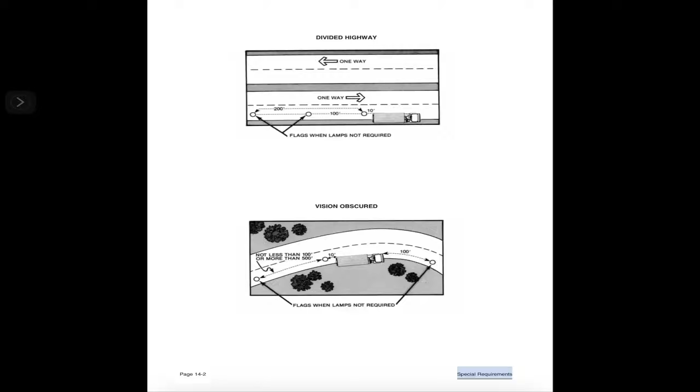The first thing the driver of a disabled vehicle must do is put out the proper flares, flags, or reflectors to a roadway. Special requirements. Page 14-1. Divided highway. Vision obscured. Page 14-2. Special requirements. Vehicle lighting and reflector requirements.

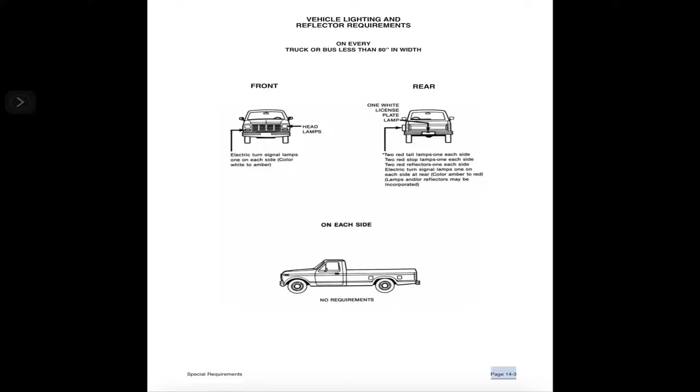On every truck or bus less than 80 inches in width: front, rear. Special requirements, page 14-3. On every truck or bus 80 inches or more in width: front, rear. Page 14-4. Special requirements. Front, rear.

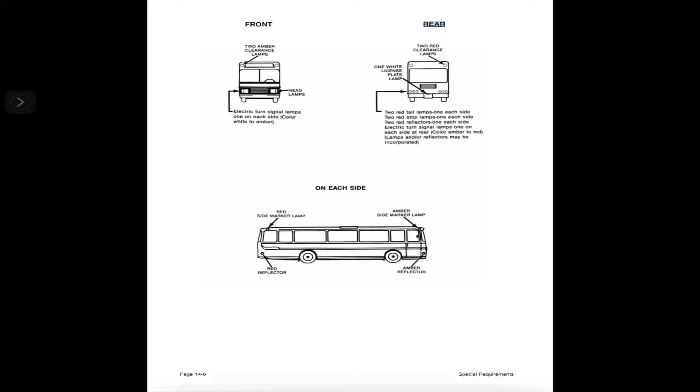Trucks manufactured or assembled prior to model year 1960 required to have at least 1 tail light. Special requirements, page 14-5. Front, rear. Page 14-6. Special requirements. Front, on every truck tractor. Rear. Special requirements, page 14-7.

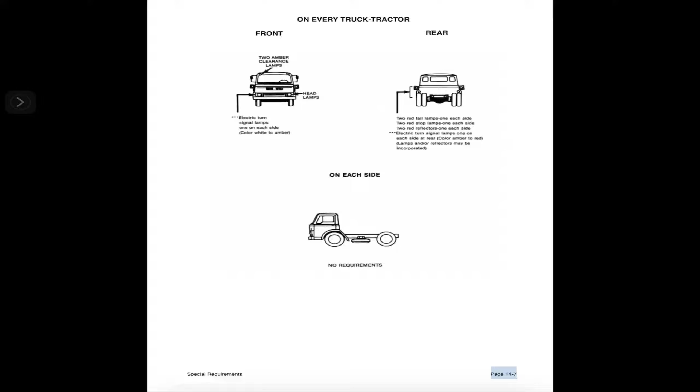On every trailer 80 inches or more in overall width: front, rear. Intermediate side marker lamp and reflector required only on trailers measuring 30 feet or more in length. Page 14-8. Special requirements. On every trailer less than 80 inches in width: front, rear, on each side. Special requirements, page 14-9.

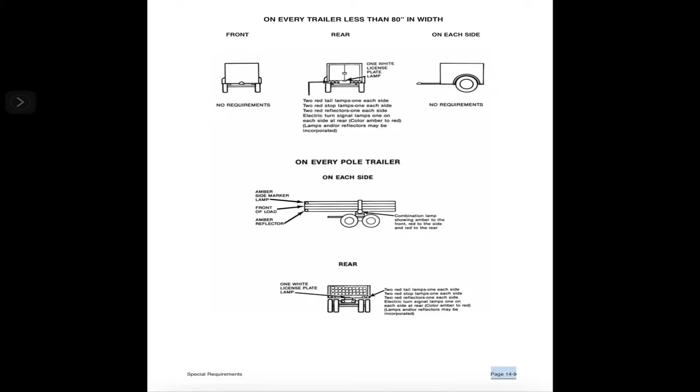Flashing lights. Flashing lights are permitted on emergency vehicles, on snow removal equipment, and on school buses when stopping or stopped for children to board or alight. These lights are also allowed to be used by tow trucks under the direction of a law enforcement officer at the scene of an accident or while hooking up a disabled vehicle in the roadway.

Special regulations for certain vehicles.

When operated on the highway at night, all animal-drawn vehicles, implements of husbandry, road machinery, road rollers, and farm tractors not otherwise required to have lamps or lighting devices must have a white light on the front visible for 1,000 feet and 2 red lights on the rear visible for 1,000 feet, or 1 red light to the rear visible for 1,000 feet and 2 red reflectors visible for 600 feet.

Brakes: trailers, semi-trailers, and pole trailers with a gross weight of 4,500 pounds or less are exempt from brake requirements. Those with a gross weight in excess of 4,500 pounds but not exceeding 15,000 pounds, operated at speeds of 30 miles per hour or less, are not required to be equipped with brakes. If operated at speeds in excess of 30 miles per hour, they must have brakes acting on both wheels of the rear axle.

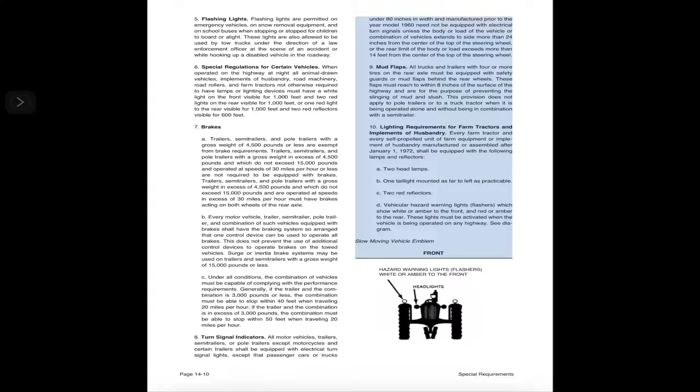Lighting requirements for farm tractors and implements of husbandry: every farm tractor and every self-propelled unit of farm equipment or implement of husbandry manufactured or assembled after January 1, 1972, shall be equipped with the following lamps and reflectors: two headlamps, one tail light mounted as far to the left as practicable, two red reflectors, and vehicular hazard warning lights (flashers) which show white or amber to the front and red or amber to the rear. These lights must be activated when the vehicle is being operated on any highway.

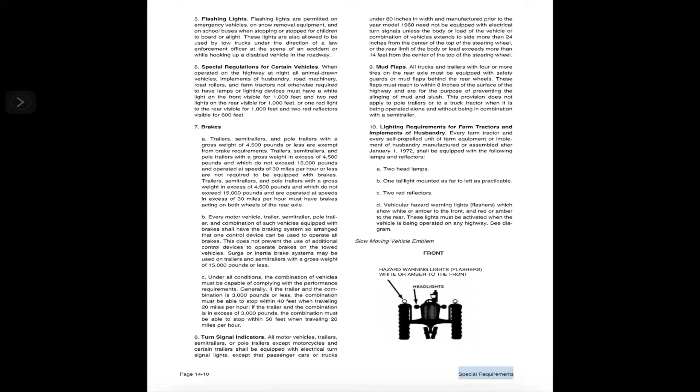Width: vehicles including loads transported may not exceed 102 inches in width. See exceptions. Maximum lengths follow.

A single motor vehicle other than a truck tractor is 45 feet, see exceptions. A semi-trailer may not exceed 59 feet when operated in a truck tractor and semi-trailer combination. A semi-trailer or trailer may not exceed a length of 28 and a half feet each when operated in a truck tractor, semi-trailer, and trailer combination. No combination of vehicles, other than a truck tractor trailer combination, may exceed 65 feet.

See exceptions. Vehicle combinations: no passenger vehicle or other motor vehicle with an unloaded weight of less than 2,500 pounds may be coupled with more than one other vehicle. Not more than 3 vehicles may be operated in a combination. Load limits: the greatest weight allowed for any vehicle or combination of vehicles, including the load, is 80,000 pounds.

Load limits are based upon the size of the vehicle, the number and distance between axles, and also on the tire size. Under certain conditions, vehicles may legally exceed 80,000 pounds by obtaining an oversized overweight permit through the Texas Department of Transportation Permit Office.